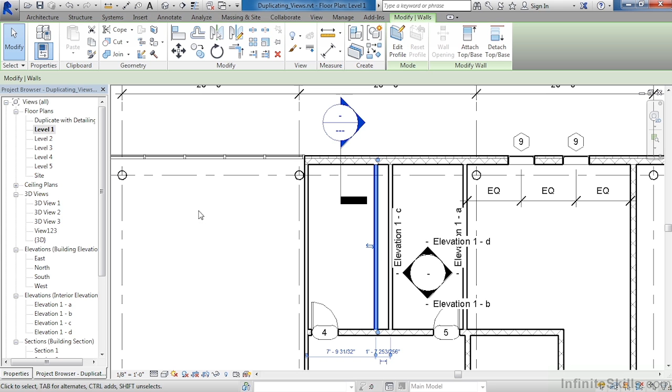But any three-dimensional object that gets changed will update in both views. If we zoom out by spinning the wheel on the mouse, then zoom in on this wall between the two bathrooms, we can then select on this wall, then click this arrow right here, and those double arrows have now moved that bathroom wall over to the other side. It's flipped the bathroom wall's face from being on the right-hand side to the left-hand side of the wall. If we look at the Duplicate with Detailing view, we can see that that change has also occurred with this wall inside of this view because a wall is a three-dimensional object.

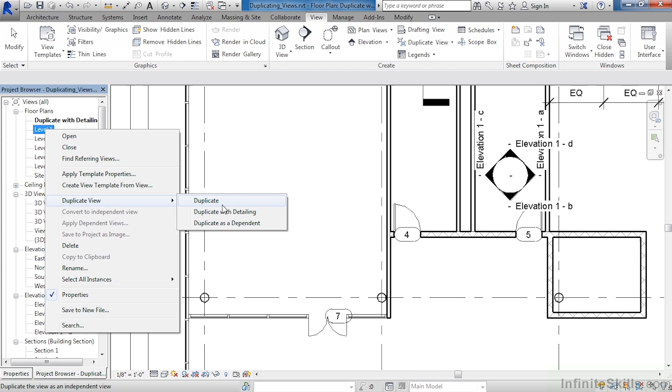There are two other kinds of duplicating that we can do. Move your cursor over and once again select on Level 1, right-click, and this time move your cursor down, highlight over Duplicate View, but now select on Duplicate. You will notice that all the annotation is now gone. There are certain things such as these elevation tags, as well as the column grids, which stay around. All the dimensions, any pieces of text, all of the tags for the doors and windows have now gone away because when you just duplicate a view, it makes a duplicate of all the three-dimensional information.

If we change any of the three-dimensional information, it will update in all the views. But by doing a duplicate, it gets rid of the text, dimensions, those sorts of things, so that we can now create such things as furniture plans or interior finish plans.

The third kind of duplicating that we can do is if we once again move our cursor up to Level 1, right-click on Level 1, move down to Duplicate View, then Duplicate as a Dependent. We can see that it has now created a new view directly underneath Level 1. Let's do this one more time. So once again, right-click on Level 1, Duplicate View, and Duplicate as a Dependent.

What dependent views allow you to do is make a change inside of the main view, and then that change will show up in both of the views that have been duplicated. Or vice versa is true. If you make a change in one of the dependent views, then that change will show up inside of the other view. This is sometimes needed if you have a view that's too long for a sheet and you need to make that view shorter so that that view can then show on one sheet and then another view can show on another sheet.

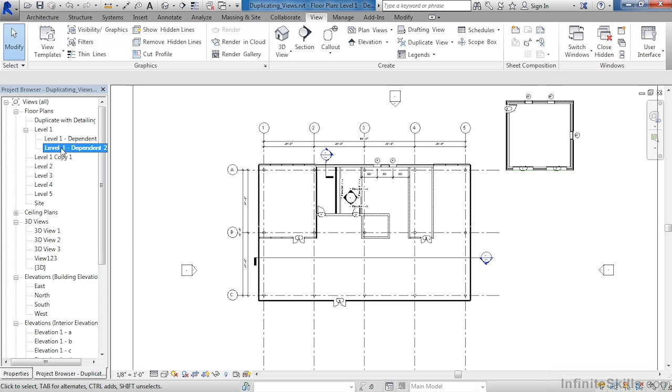An example of this would be if we right-click on either one of these dependent views, go down to Rename, then call this Left, click on OK, rename the other one by right-clicking on its title, going to Rename, typing in Right, we now have a left-hand view and a right-hand view.

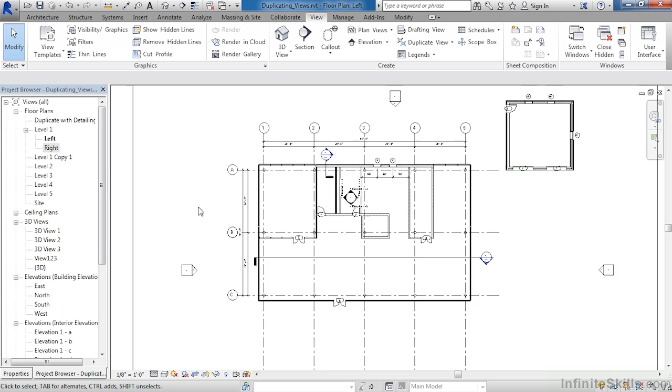If we zoom out with this view, making sure that Left is currently selected, we can now select on this box that goes around the view. This is called the crop region. Then click on this dot and pull it in. Now we just have the building on the left-hand side. If we click on this dot here, we can further crop it in.

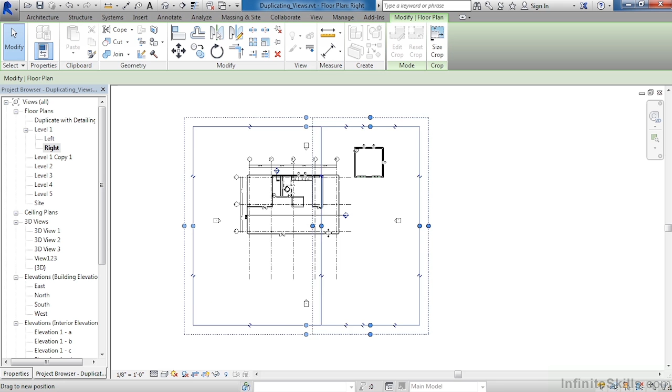If we double-click on Right, we can see that we have the view that has all the information in it. Once again, select on that box, grab onto that dot, pull it over. You can pull it over again. Now we have the other building over on the right-hand side, and that could be on the right-hand sheet.

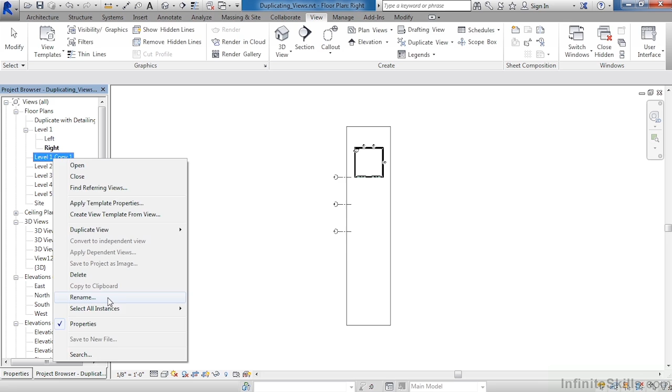And finally, while we're here, go to the Level 1 Copy 1, select on that. This is the view that we actually just made a duplicate of. We want to call it Duplicate. So let's right-click on that view name, move down to Rename, and now name this view Duplicate, and select on OK.